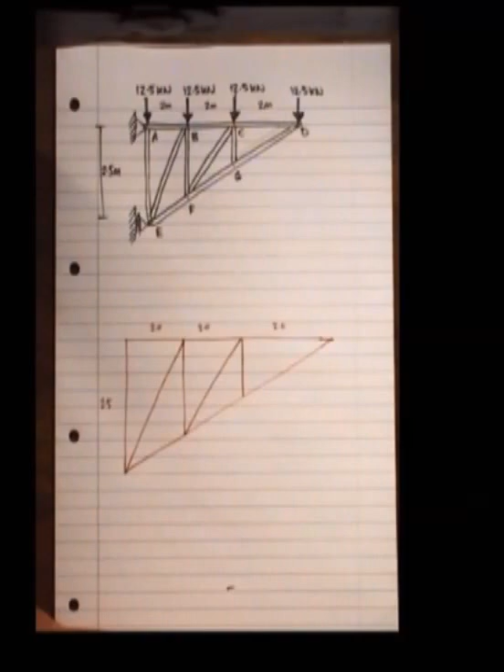Okay, this is a second example of working out the force within members, working out the reactions using the method of joints. So again, the first thing that you would be doing is looking at the external forces only to work out the reactions, and we need also the angles to work out the member forces. So you need to practice your trigonometry to work out the angles, and I'll go through quickly some of the angles for this truss here. So you draw your free body diagram.

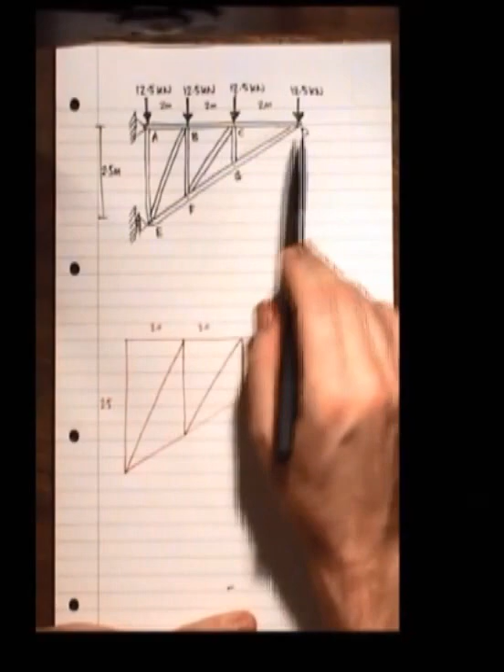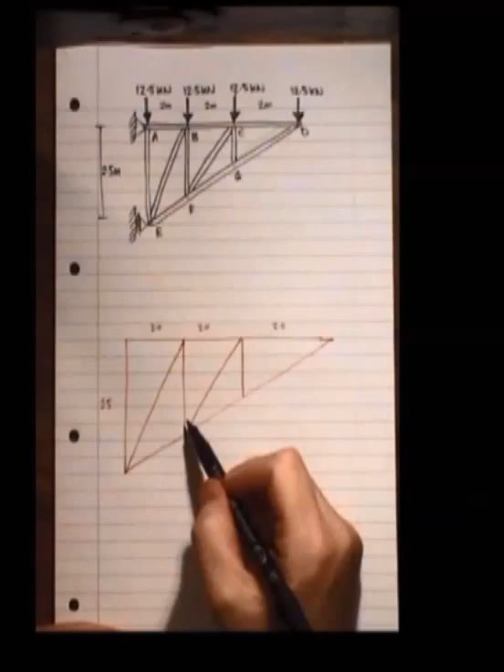So we've got a truss here with a number of members. Again, it's labelled up A, B, C, D, E, F, G. We've got a pinned joint support here, and we've got a roller support at E. I've drawn my truss. The things that I know is that I have 12.5, 12.5, 12.5 and 12.5. I've got that these are spaced 2 meters apart, so it's not drawn at scale. A, B, C, D, E, F, G.

Now, our reaction at E, we have a roller joint. Whenever you have the roller joint, you will have a force perpendicular to the rollers. So we'll call that EX. In terms of the direction of the reaction, if I took moments around A, so if I put my finger down there, and if I imagined all of these forces are pushing my triangle around clockwise, my external force, the reaction EX, needs to be counteracting by giving an anticlockwise moment.

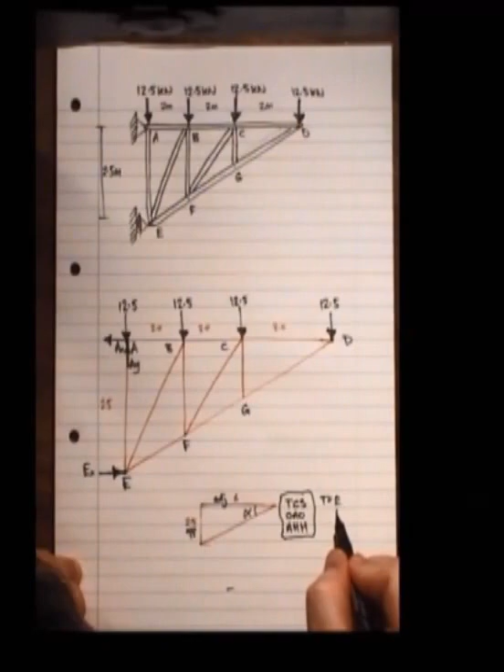So I do my opposite, 2.5 divided by 6, inverse tan it. So if I inverse tan this, I get alpha equals 22.6. So this angle here is 22.6. Now you'll see as we look at each of these joints that the angle GD, that is also 22.6. This angle here is 22.6. Again, this angle FG is 22.6. So you need to try and become familiar with how you work out angles.

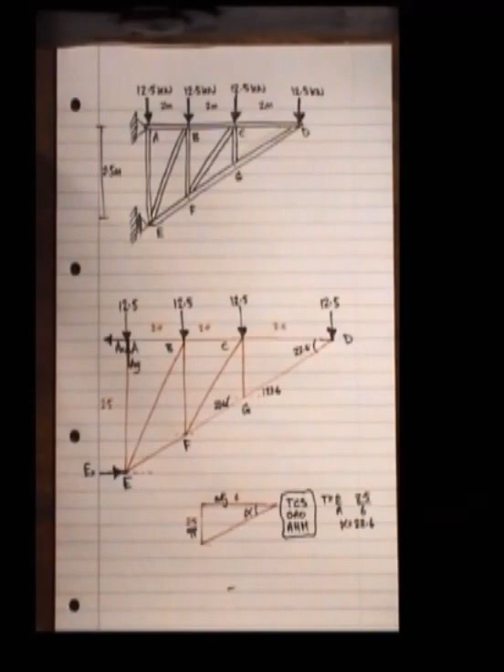We'll also work out this angle here, and we'll call that gamma. So in terms of gamma, we've got AB there and straight down, so we've got 2 and 2.5. Work out what gamma is. It's inverse tan of 2.5 over 2. Our gamma becomes 51.34. That's what our gamma is. If we've got a gamma and we've got a 90-degree triangle, we can work out what this beta angle is. Beta equals 180 degrees in a triangle, take away 51.34, take away 90. Our beta is 38.66 degrees.

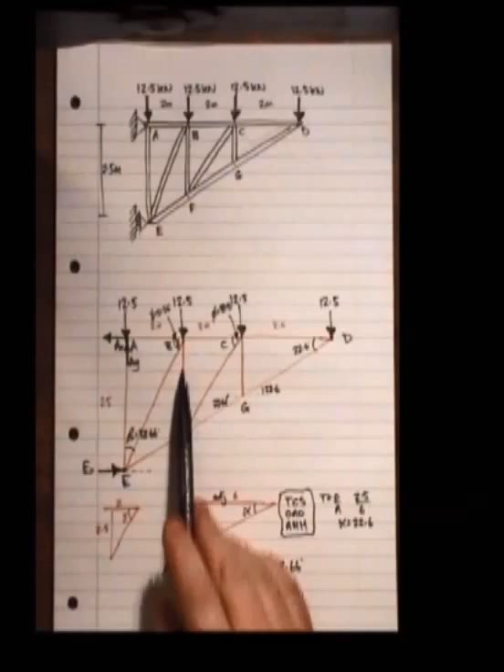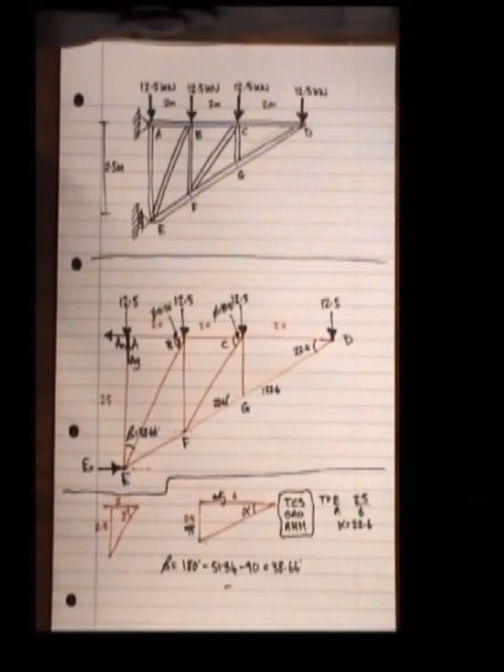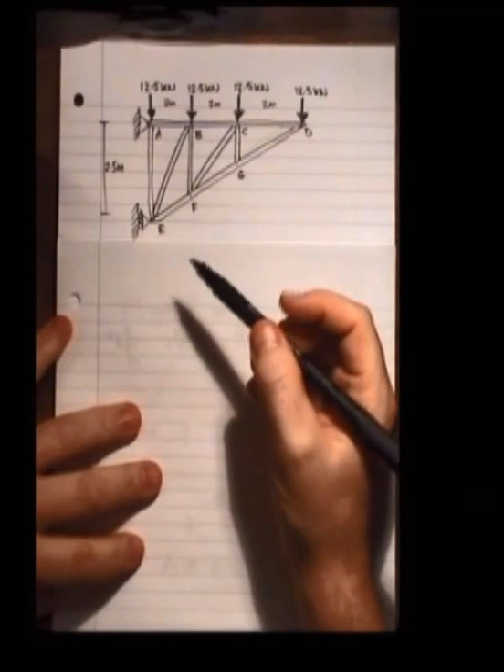I'll also be working out the angle, and we'll call that theta. That's 39.81, the angle there. That's just based upon similar triangles. That ends up being, this length here becomes 1.67. So I intend you to understand how to work out your angles. Now I know what my angles are, I can start looking at the reactions. So let's see what we can do here. So 1, we've worked out the angles, and 2 is the reactions.

And our reactions are at A and E. So we can draw out the triangle that we have. We've got AX and AY. These are the forces that we're considering. You only consider the external forces. And then you've got these four 12.5s.

Now we don't know what AX is, we don't know what AY is, we don't know what EX is. We've got our three formulas that we can work with. Sum of moments around a particular point is 0, sum of forces vertically, sum of forces horizontally equals 0. It's all about this triangle. This truss is going to stay in one place. How do I get rid of AX and AY?

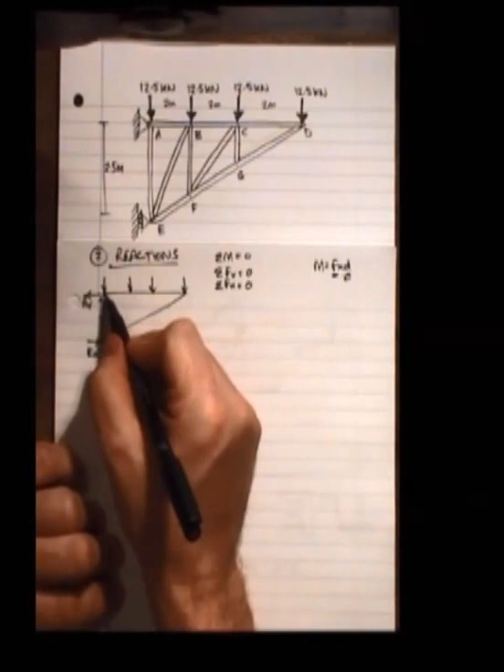Take moments about a point that they are passing through. If I took moments around E, AY is passing through it. So if I've got my moment equals force times distance, even if AY has a value, because the force is passing through the point A, the distance is 0. A force times 0 means that the moment is 0, so you ignore this AY. EX is also passing through E, so therefore it's 0 perpendicular distance.

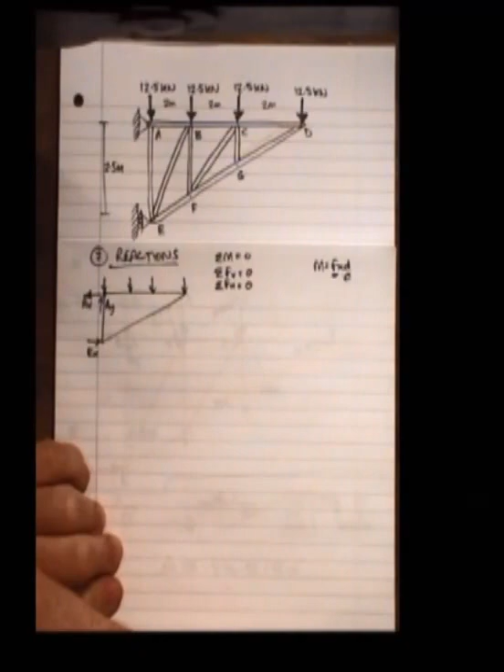So let's take moments around E. About this point, the perpendicular distance from this point to this force, so this is my force AX, and the perpendicular distance to E is 2.5, the depth 2.5, so all that equals 0. So we've got AX, and I'll put my distances in brackets again, 2.5. I'm saying that everything that is going about A, so this AX is going to be sending my triangle around anti-clockwise, and I'm saying that everything that is going anti-clockwise is positive.

So you've got your AX, ignore AY, and I've got my four 12.5s to consider. Now this 12.5 is acting straight through A, so we ignore it. Again, 12.5 times the distance 0 just gives us 0. So we've got our first force here, minus 12.5 times the distance 2. We've got 12.5, this one here, times the distance 4. And you've got the last one in the corner, 12.5 times 6. All of that equals 0. AX equals 60 kilonewtons. It's positive, so therefore I've guessed the direction of my AX correctly.

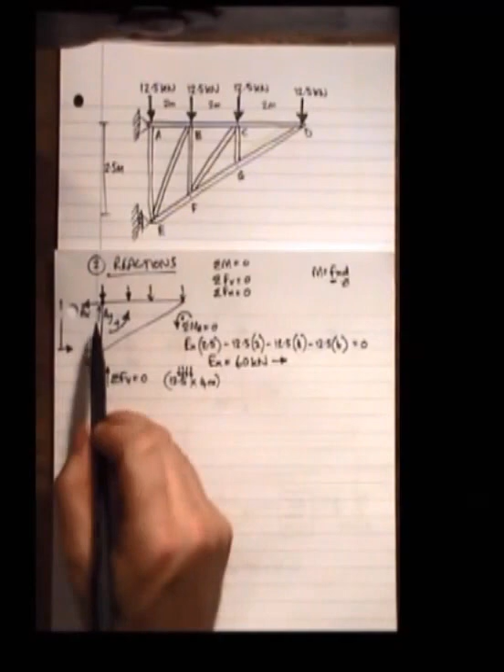I could take moments around A, that would take out AX from my equation, and because AY passes through that, it would also remove AY, so I could work out what EX is. But let's use one of the other equilibrium equations. Sum of forces in a vertical direction equals 0. And we'll say that everything going up is positive. So looking at the forces here, we've got 12.5, and there's 1, 2, 3, 4 of them. There's 4 of them coming down. Going upwards, the only upward force is AY. So AY is 4 times 12.5 equals 50 kilonewtons, and it's going upwards.

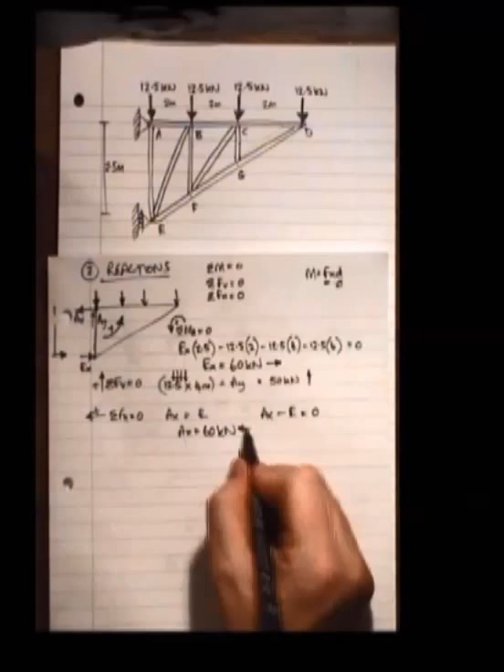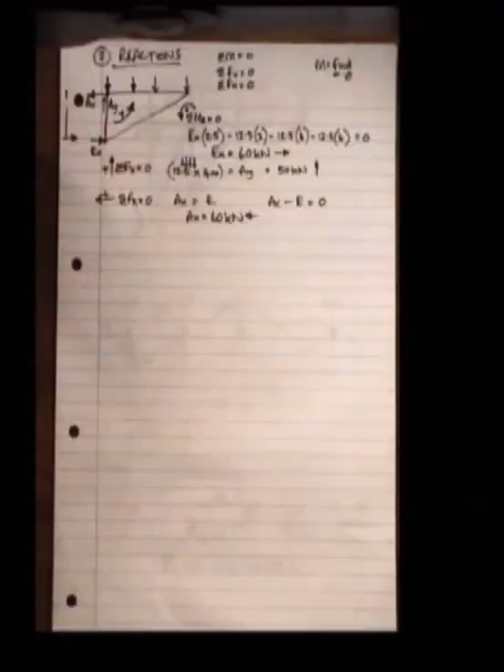If I sum my forces in a horizontal direction, I'll say everything going that way is positive. We've got AX is positive, EX is going the other way. Or another way of writing it would be AX is going that way, minus EX because it's going to the right, that all equals 0. So AX is the same as EX. AX equals 60 kilonewtons, and it's that way. So we can draw these onto our free body diagram. We've got 60, and AY 50. We've got AY and AX of 60 kilonewtons.

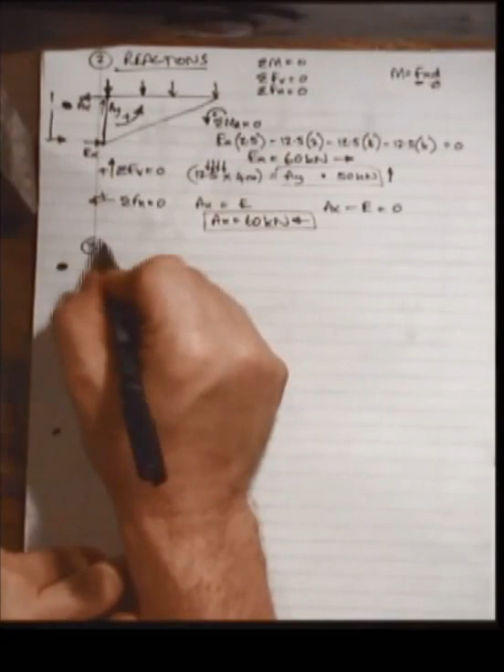Next, we'll work out what the forces are, and we have to look at each joint, and all of those in red are those that I don't know. So I can start at any joint. I could start at D because there's 2 there. I couldn't start at G because I've got 3 unknown members. I've got 4 at F, so it'd be silly to start there. We will start possibly at A. E, you've got 3 there. So let's start at D.

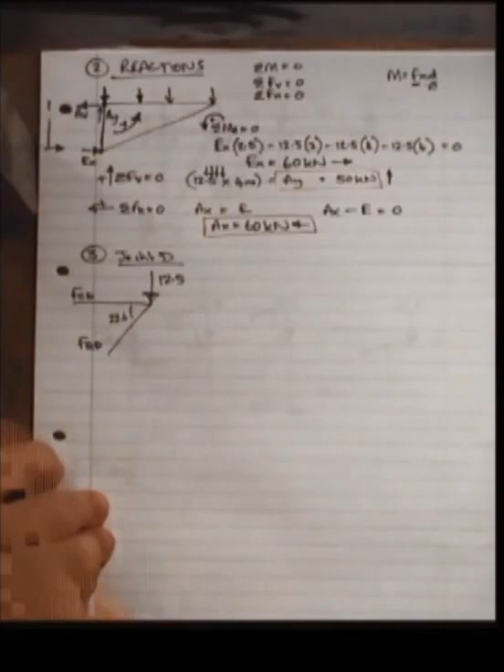So looking at joint D, we have a 12.5 load at that point. We ignore all of the forces that are anywhere else on the frame. We have this member CD. We have a member GD, and we've got this angle 22.6. Now looking at these 3 lines, 12.5 is coming down. In order to keep joint D in that location, FGD must be pointing upwards. If I looked in a horizontal direction, FGD is going to the right, so therefore FCD must be going to the left.

If I look at some forces, and I say that everything that is going up is positive, I've got my FGD, and again I'll just draw this off at the side. FGD, if that was the hypotenuse, how much of that FGD is acting straight up? Imagine that it's just a triangle, it's opposite the angle, so it's FGD sine the angle 22.6. So you've got this one here. You ignore FCD because it's horizontal, because we're looking vertically.

Going downwards is our 12.5, all of that equals 0. You can take 12.5 on the other side of the equal sign, divide by sine 22.6. FGD equals 32.5 kilonewtons. The actual line itself, it's like that. Arrows pointing outwards, so it's compression. Remember, FGD is in compression. Sum of forces horizontally, saying that everything going that way is positive.

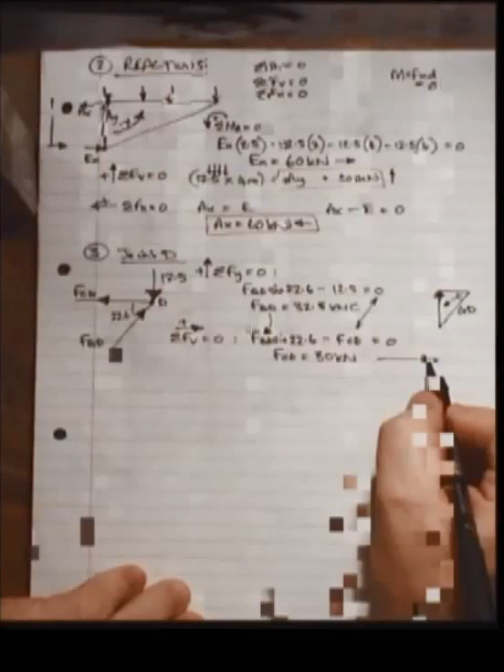FGD, this member again, how much of the GD is acting horizontally? FGD is cosine 22.6. How much of the 12 is acting horizontally? None of it, so you ignore it. And you've got the FCD. That's going the other way, so it's minus. FCD equals, put that FGD into there, gives you the FCD. 30 kilonewtons FCD, the arrow is pointing inwards from D. It's in tension.

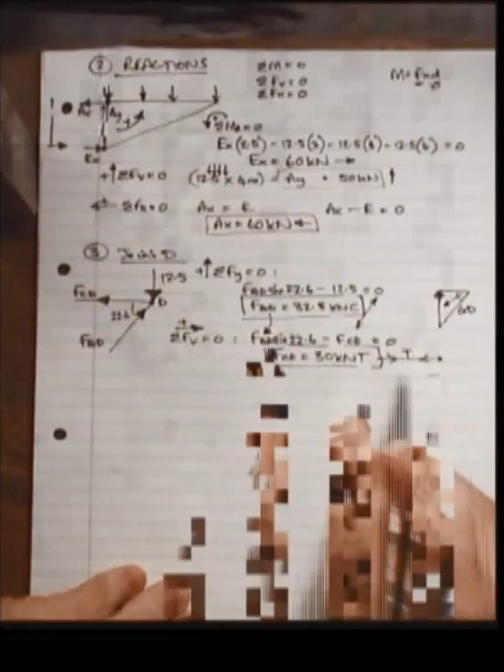I'll draw them. So we've got FGD inwards, 30 in tension. 32.5 in compression. Got them the wrong way around. Easily done. This one here is 30 in tension.

It's important to note which way your arrows are pointing so that when you come to your next joint, joint G, you can easily transfer your information from one joint to the next. So we're going to be carrying forward this GD to point G. So joint G. We've got F down here, G there, and D's up here, and that's C. So we're looking at G.

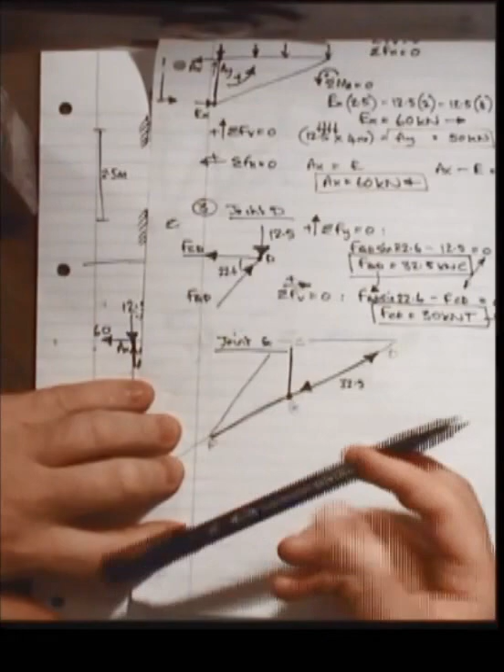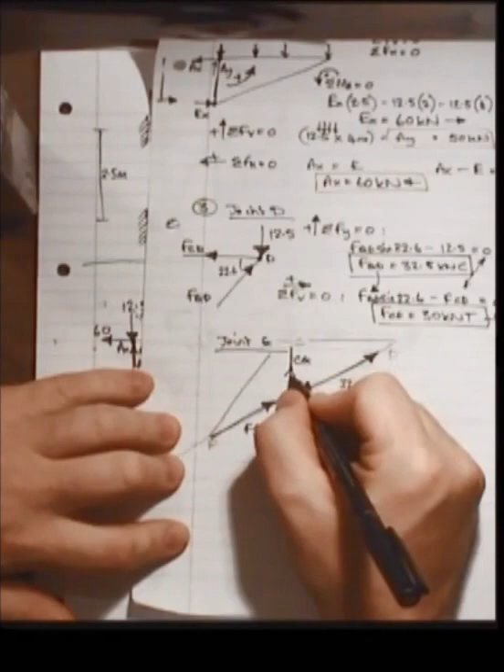So we just worked out that FGD is 32.5, arrows are pointing downwards, outwards. If you were going to look along this plane here, FGD is pointing to the left, FG is highly likely to be going to the right, and actually CG, you're not really sure which way it's going, so we'll guess that it's going upwards. So let's see what we've got. So we're analysing this joint G with this 32.5 that we know, and we don't know what that is, and we don't know what that is.

Now, if we look at the sum of forces, say that everything to the right is positive, we remove CG, because CG is acting purely vertical... So if we look horizontally, then it removes CG. If we look at force in FG, how much of that is acting horizontally? We have an angle of 22.6 here, so it's cosine 22.6, that's the FG. The other force that we have at this joint is 32.5, and again it's cos 22.6. You can remove cos 22.6 from either side. FG equals 32.5. It's pointing outwards. It's in compression.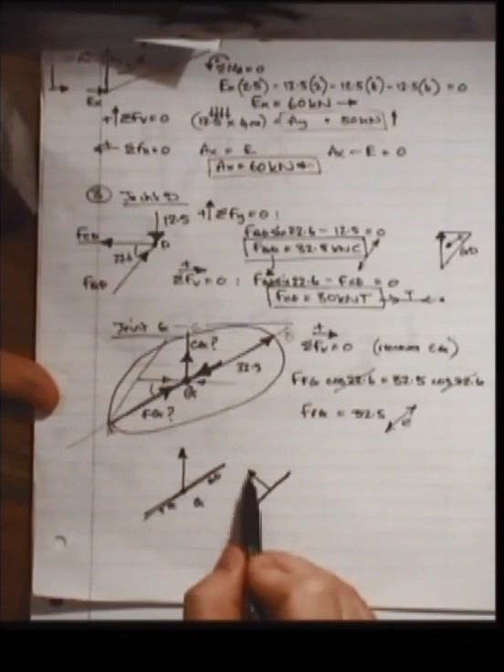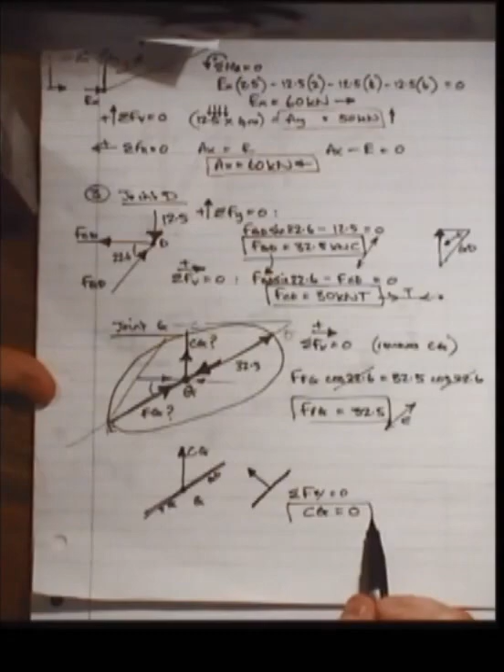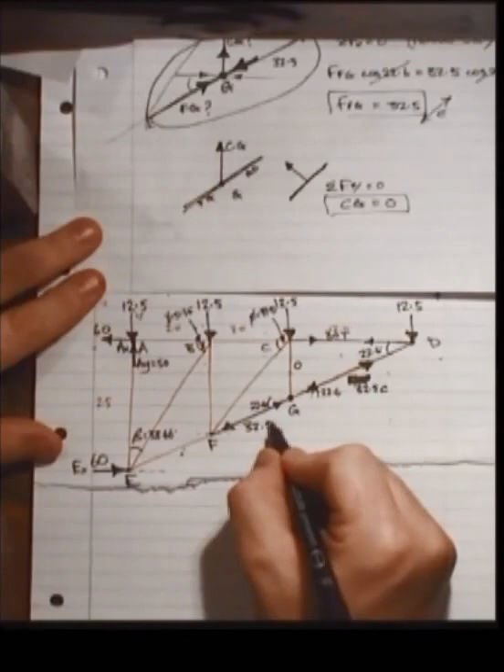Now if I draw this G again, now FG is parallel to GD. If we analysed forces perpendicular to GD and FG, you'll see that the only force that we can include either side of these two lines is CG. CG acting by itself. So the way that we can write that, sum of forces perpendicular to that line equals 0. Our CG is the only force there, so it equals 0. So CG equals 0. Our FG is 32.5 in compression. Worked out that one.

We've got two unknowns at C. We've just worked that one. We'll move to C. Let's draw it out. C. We've got this 30. That's FCD. We've got a 12.5 coming down. We've got CG, which is 0. And you've got CF. So we don't know what CF is, and we don't know what BC is.

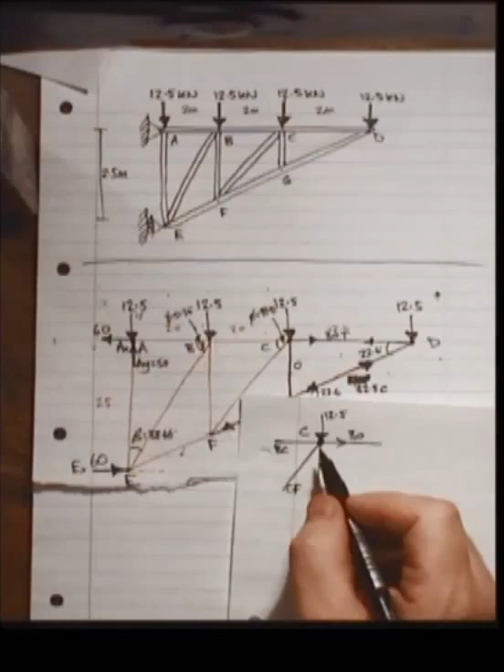Now if we looked across the line vertically here, we've got 12.5 coming down. These two are not having an effect trying to keep C vertically. So if 12.5 is coming down, it means that CF must be going up. But what we'll do, we'll draw it pointing downwards just to see what values we come out with. And we've got our 30 going off to the right, so we'll guess that BC is pointing to the left here. So let's work with this.

So this is joint C. Always remind yourself where you are and what you're working on. It certainly helps when someone is having to check your work. Engineers have to check your work afterwards, and it makes it easier for me to check your work. Sum of forces. Sorry, we'll do the Y direction first.

Now what have we got here? We're saying everything that's going up is going to be positive, so we've got 12.5 coming down. We ignore the BC and the 30 because they're horizontal. You've got the 0 there. And we're saying that CF is also going down, so we've got FCF. How much of that, if that was the hypotenuse, how much of that is acting vertical? It's sine

39.81. We've worked out that angle there was 39.81. We worked that out before. Well, that equals 0. FCF ends up equaling minus 19.53 kilonewtons. What this means is that we have our arrow the wrong way around. FCF, so that looks like, we were saying that it was going to be in tension. That's if you have a minus in front of it. FCF actually equals 19.53 kilonewtons in compression.

So to correct this, let's draw our arrow going upwards. We would adjust this formula, but we now know that we definitely have to have CF pointing upwards like that. 19.53, and it's going to be in compression. So we didn't guesstimate that it was that way. It may be better to keep the original guesstimate and highlighting that FCF. And that's the correct direction for FCF.

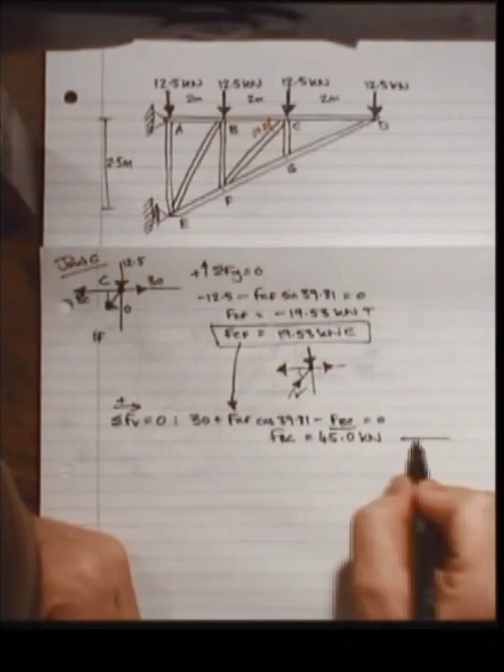FBC equals 45.0 kilonewtons. We're saying that FBC is pointing inwards, so it's tension. FBC pointing inwards, 45 T. So we've now worked out C.

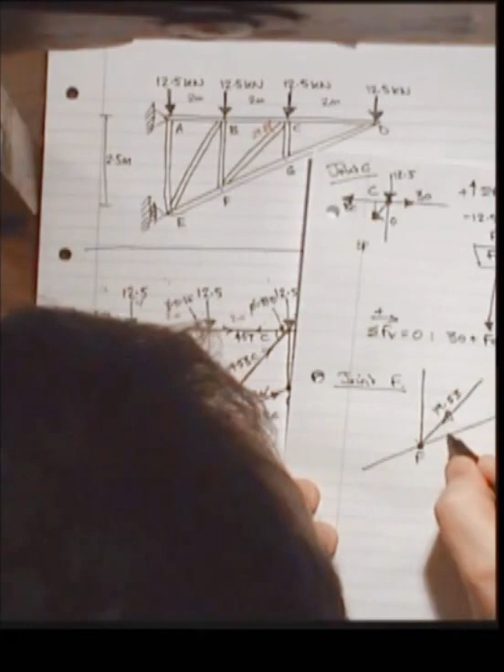So this is FC, that's FG, FE, FB, F, force FG. This angle here is our 22.6. The angle from the horizontal to FFC, theta, is 39.81.

FBF is vertical. Now looking at these again, if we looked sort of horizontally, they're both coming to the left, so I'm guessing that FEF is going to the right. If you looked across FEF, FG, that's coming down, so let's assume that FBF is going upwards.

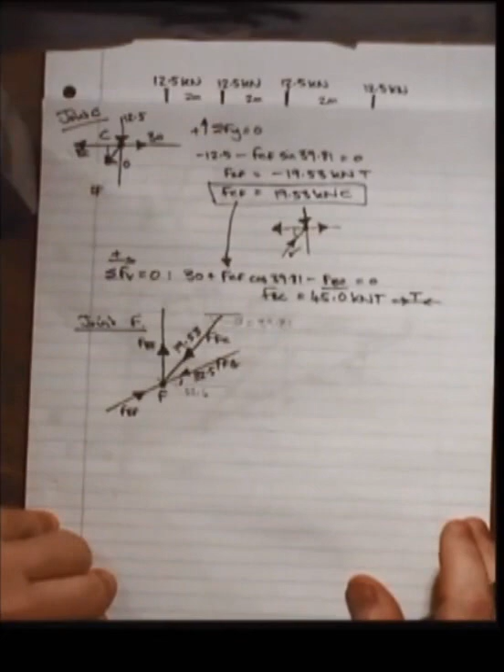Sum of forces, plus FEF, this one here, again that's 22.6 degrees. So this FEF, if I draw that again there, so we've got 22.6. How much of that hypotenuse is acting horizontally? This angle times by cosine. Cosine 22.6

minus, we have this 32 going to the left, 32.5 cosine 22.6, minus, also going to the left, is our 19.53. That's your FFC, cosine 39.81. All of that equals 0. The only thing that we don't know is FEF. FEF equals 48.8 kilonewtons. The arrows are pointing outwards, so it's in compression.

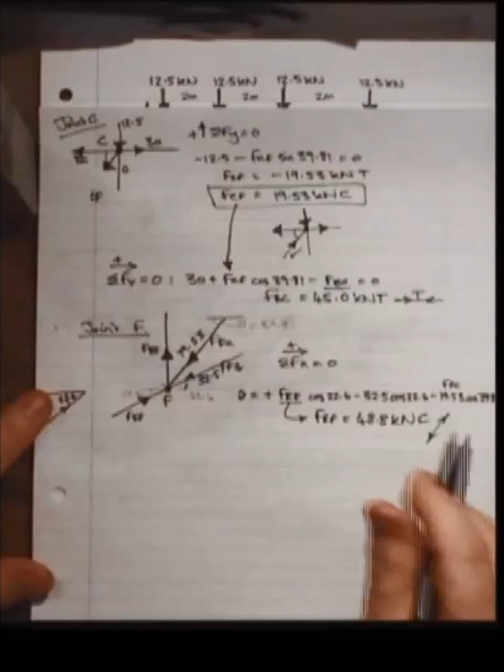We're getting there. Sum of forces, y direction, I'm saying up is positive, equals 0. Right, well, we've got FBF, FEF, how much of that is acting upwards? Sine 22.6. So FEF, how much of it is there? It's sine opposite. Minus, because it's coming downwards, we've got our 19.53.

Sine 39.81. And then we've also got 32.5, which is our FFG, sine 22.6, and all of that equals 0. FBF, we know what FEF is. FBF equals 6.25 kilonewtons. We're saying that FBF is pointing inwards,

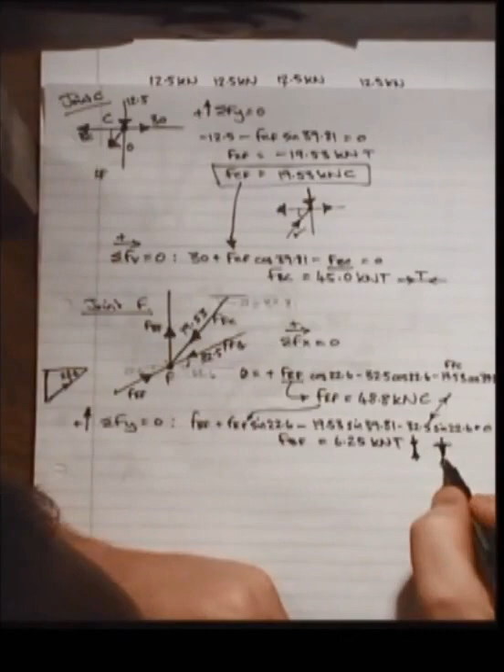therefore it's in tension. Sometimes when I look at these arrows, if I draw the arrow like that, if I imagine it going inwards, I look at that line there and I think of tension. So that arrow inwards, I always think of it as looking like a T for tension, where outwards is compression. Don't know if that helps any of you.

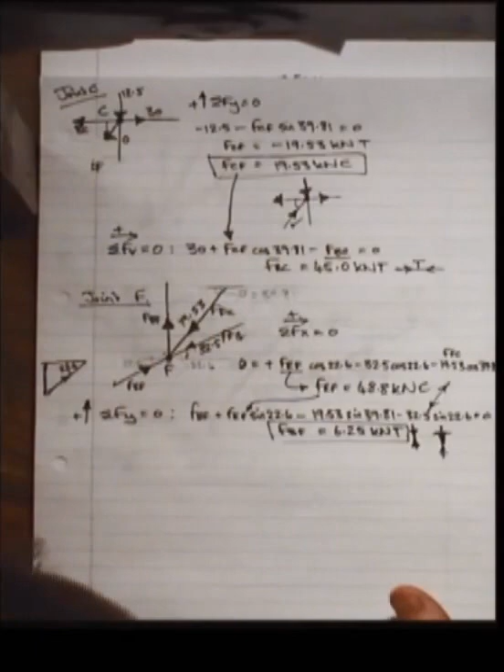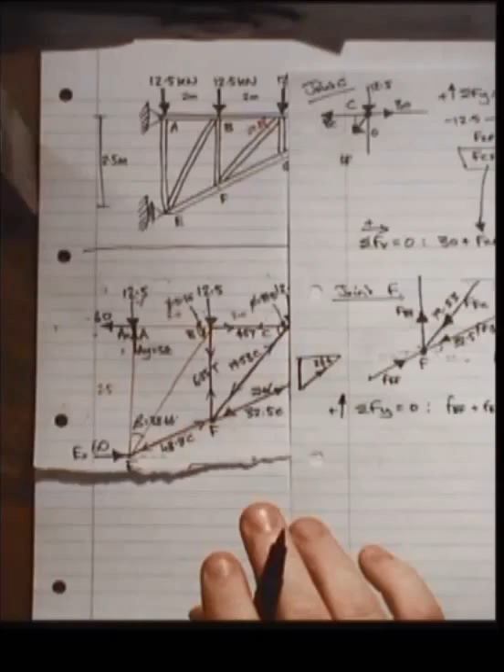Right, two more joints, joint B and joint E for our check at the end. So if I just add what information we've got. Right, FEF, we've just worked out that one. So they're pointing outwards. That's 48.8. And FBF, this one here, pointing inwards, 6.25. That's in tension. So we've got B, E and A. Actually A is left also.

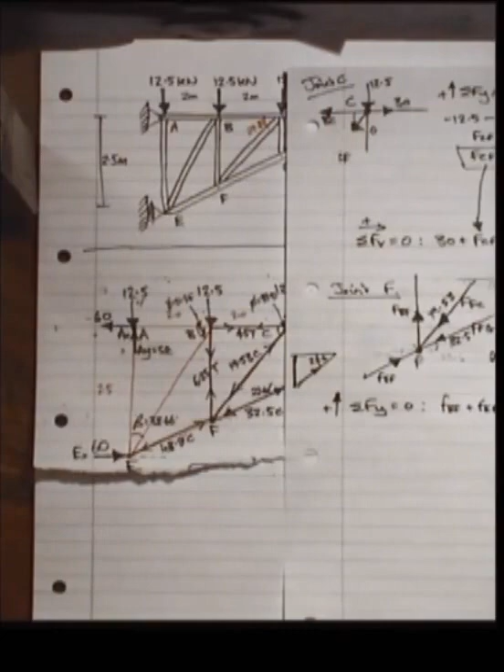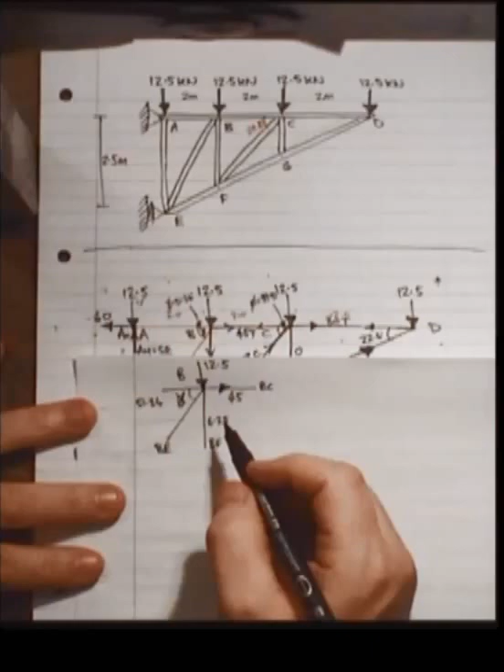Joint B, this one here. So B, we have 12.5. We've got this angle, gamma, which is 51.34. Got 45, which is our BC. 6.25, which is our BF. And you've got BE. And we don't know what it is. Off we go again. It's in tension. BF. Okay, so sum of forces.

Say ups, positive, equals 0. Minus 12.5, this one here because it's coming down. So imagine again that B is staying stationary. So minus 12.5 coming down. Our 6.25 is also coming down. Our BE, let's assume because both of these are coming down, is going up. So it's going to be in compression.

FBE sine 51.34. If we work that out, FBE equals 24.0 kilonewtons. It's pointing, the member itself, the arrows are pointing outwards, so it's in compression.

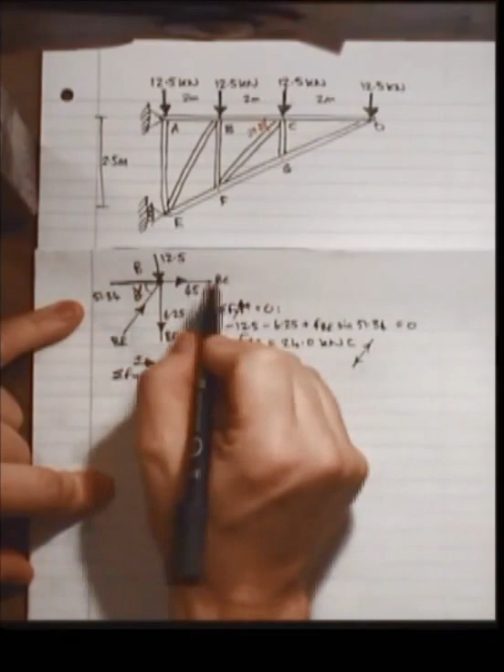Sum of forces, x direction, and see that everything to the right is positive. 45.0, that's BC. Let's assume, because BE is going to the right and BC is going to the right, let's assume that BA is going to the left. That 51.34 is the angle gamma. So minus force in BA, that we don't know what that is yet. And then we've also got this 24.0, this is our FBE. And how much of that is acting horizontally? Cosine 51.34. All of that equals 0. Our only unknown FBA equals 60, and tension.

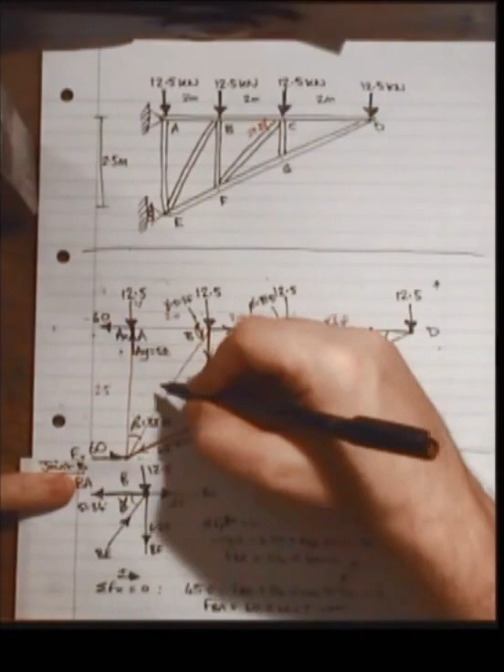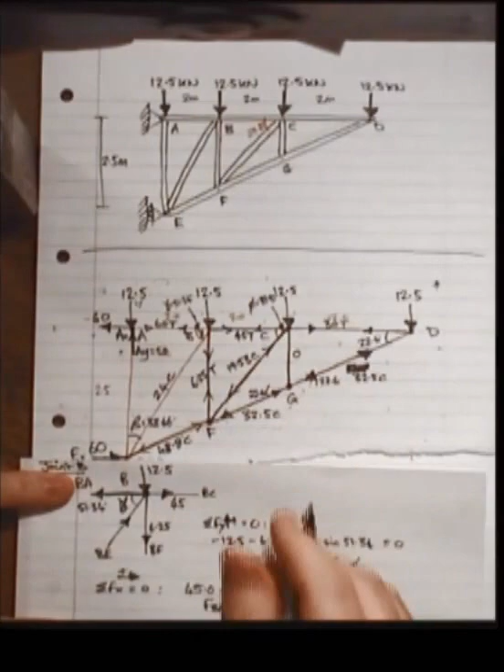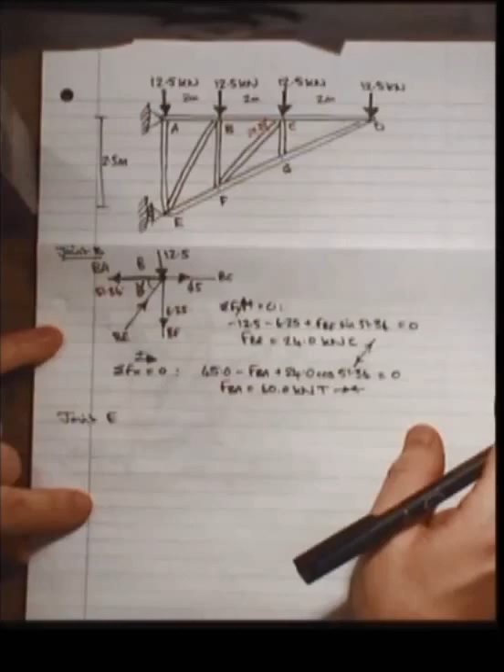So that's joint B. Let's help whoever's checking the work. Joint B, so BE, we've got 24. That's in compression. AB is 60. That's in tension. I hope your work's neater than this. Joint E. Let's have a look at joint E.

By the end of this, we'll actually have all of the members, and we're doing our check at E. You could do another check at A also to see, when you looked at the horizontal and the vertical, does that 60 equal 60? That's correct. We've got 50 going up and we've got 12.5 coming down, so you can work out what the force is in that member. So this is the last check, so we're nearing the end.

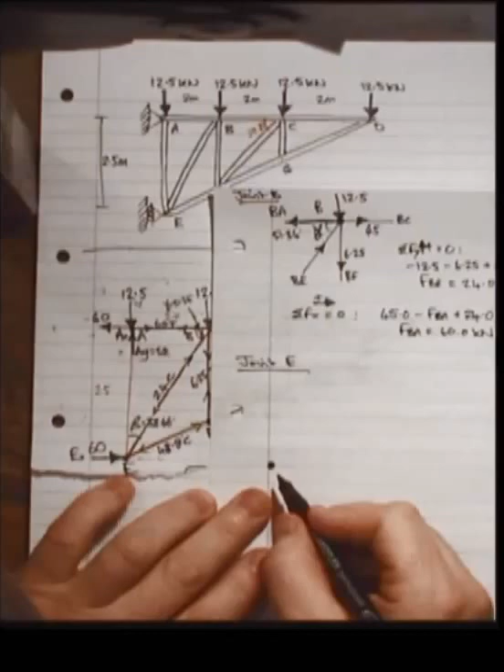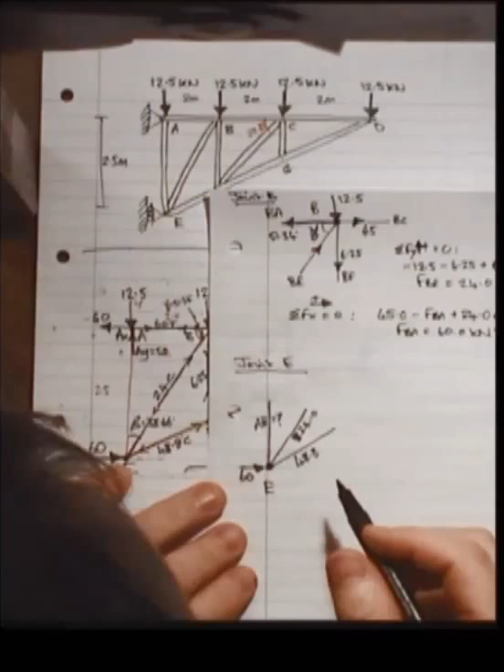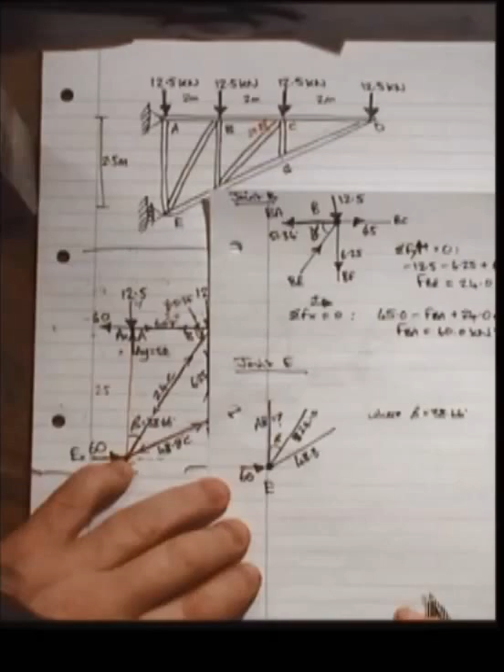So we have E, we've got our reaction of 60, we've got our member there, 68.8, another member there, 30 and 24.0. We don't know what AE is. This angle here is beta. We've worked out before, or you have to work out, that beta is 38.66. And this angle here is 22.6.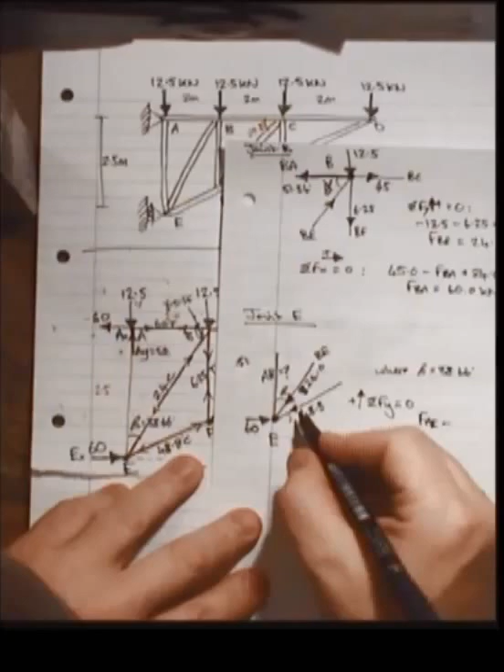Sum of forces, Y direction, I would say that everything going up is positive. FAE, force in AE that we don't know. Let's double check the arrow direction. BE is going downwards. EF is also going downwards to the left. So looking vertically, you've got FAE, this here, and we're saying that it's going upwards. You've got these two forces that are coming down, so you might as well assume AE is going upwards.

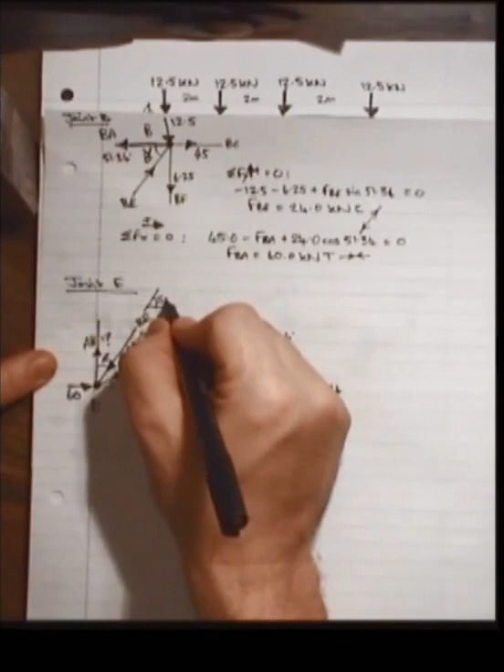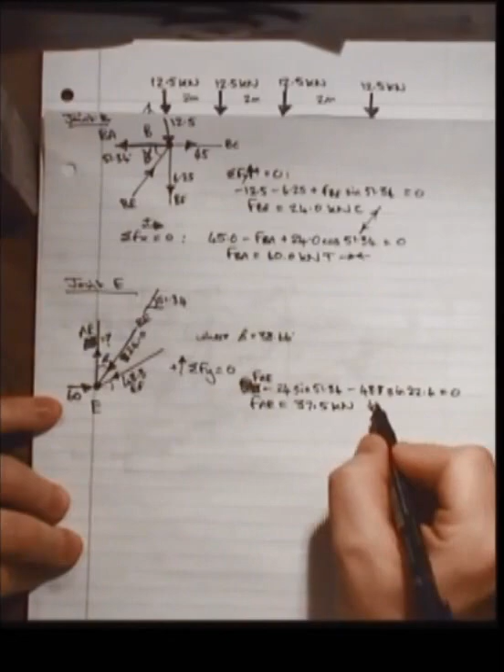You've got 24 sine 51.34. That's the angle here. So that angle is 51.34. That's the angle of BE to the horizontal. You've also got your 48.8 sine 22.6 equals 0. How do I write the first name? AE. FAE. That's AE. FAE equals 37.5 kilonewtons. The arrows are pointing outwards, so it's tension.

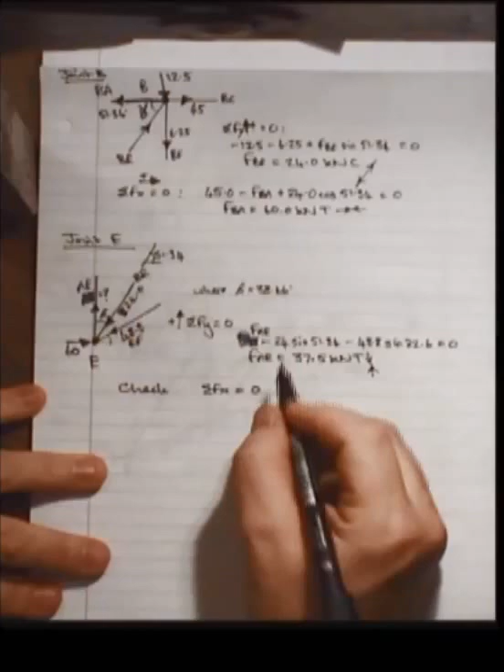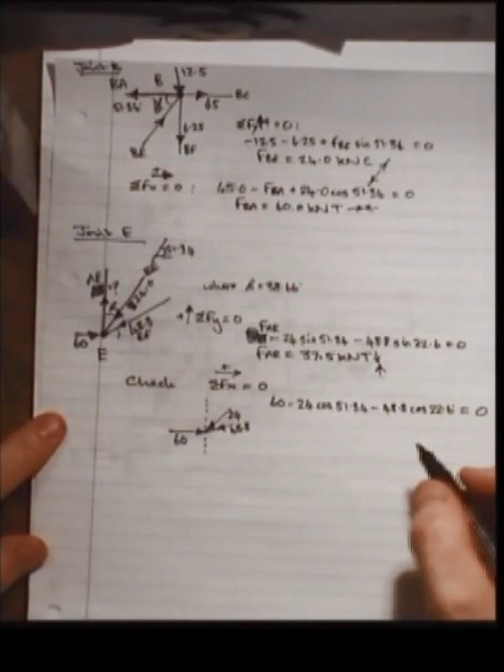We can do a check. Sum of forces. See everything going to the right is positive. What have we got? We've got our 60 going that way. The AE we can ignore because it's vertical. You've got your 24. Minus 24, and only a percent is acting horizontally. So 24 cos the angle. And you've also got minus 48.8, minus 48.8 cos 22.6 degrees. And does all that equal 0? Well, when you work it out, this side is 0.045, which for me is close enough, and that's a check.

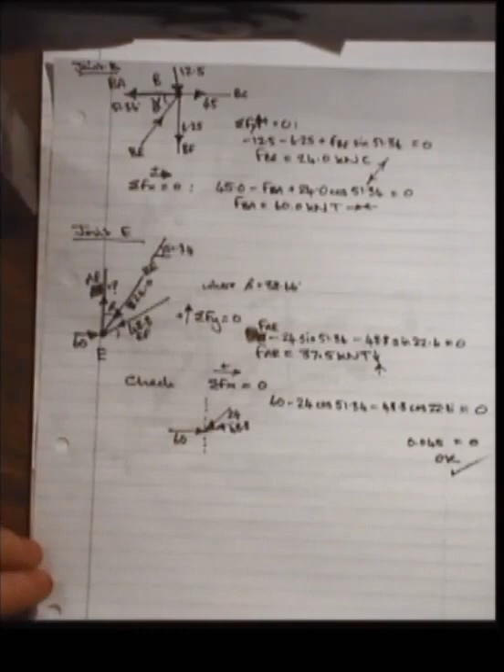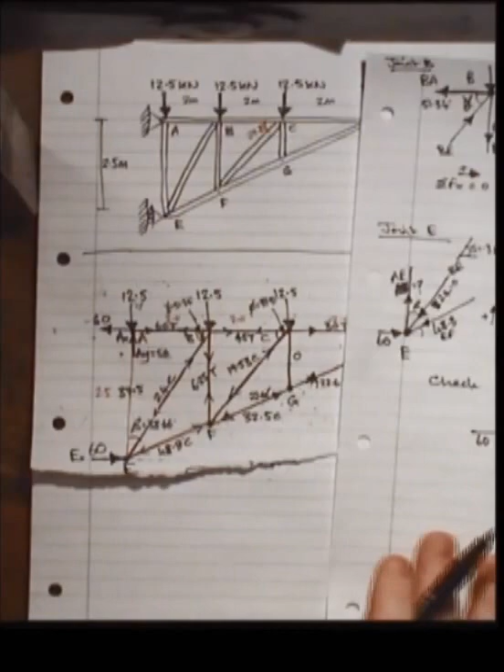You could do another check at the end. So FAE is 37.5. So now we've got all of the members in, and you could do a check there also, looking at vertically and horizontally. That's the end of this second example.